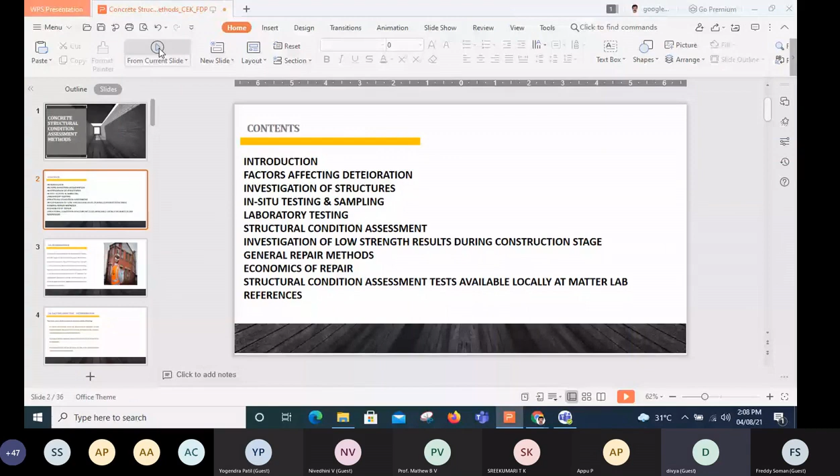The topic is concrete structural condition assessment methods. As you might be knowing, concrete is the second largest consumed material after water. As such, it's very important to have this branch - forensic engineering of concrete structural elements, inspection engineering and everything. It's a newly developing branch worldwide. When I was working in Oman, we were part of a British company, one of the world's biggest laboratories, having presence in about 30 countries with about 200 labs worldwide - one of the biggest of its kind. Still, in a lot of areas, particularly the forensic engineering side, a lot of developments are still going on.

The most sophisticated methods and everything will be gone through today. These are some of the contents we have incorporated: factors affecting deterioration, investigation of structures, in situ testing, sampling, laboratory testing after structural condition assessments, investigation of low strength results during construction stage, general repair methods, economics of repair - these are some of the areas we will cover during the discussions today.

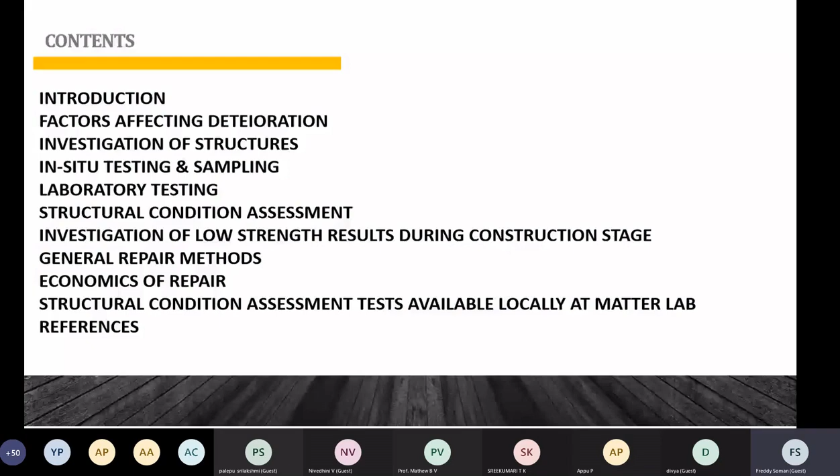As you all know, concrete, its components and its properties at various maturity stages can be tested in many ways. Concrete properties are assessed by methods ranging from strength tests to various other tests, including durability and its capacity to protect the embedded reinforcement steel. While some methods require extraction of samples from site, some methods constitute in-situ testing, doing testing at site.

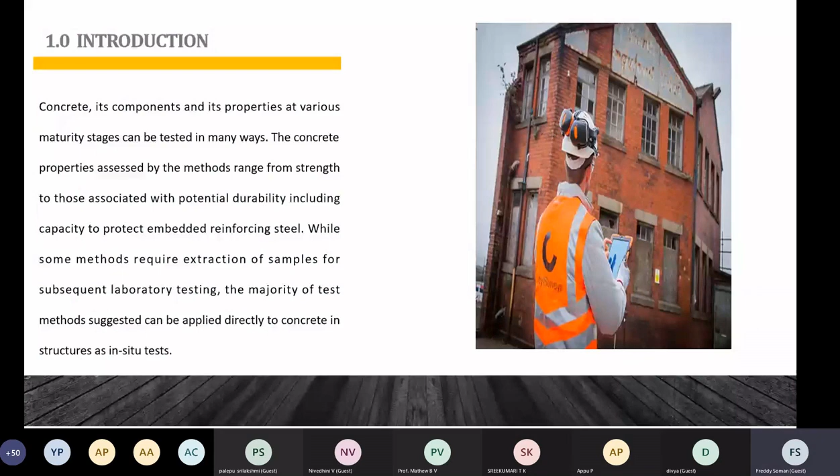Our aim of investigation and testing regime should be to obtain sufficient information on the condition of the structure to enable appropriate remedial steps to be taken. That's why, before we go for any repair or remedial measures, it is imperative to have the structures studied properly to understand the intrinsic and underlying problems. Only after that should we go for the remedial measures. It's necessary to have a sound understanding of the underlying issues before we set out any repair programs. That's the one important thing we all want to keep in mind.

What are the major factors affecting deterioration? Whether a building is new or very old, there are several factors that may affect its deterioration over time. The major causes may be inbuilt problems such as inadequate design, poor workmanship, use of unsuitable materials that don't suit the correct specifications, inappropriate use of cement, or inappropriate concrete mix design. The mix design itself may be wrong.

Again, features which appear during construction - some distresses may appear during the construction stage itself or shortly afterwards - and problems caused by the actions of the local environment on the completed structures. Over time, due to environmental effects, buildings or structures may deteriorate. The features which appear during construction or shortly afterwards include a lot of distresses, particularly cracks, spalling, and other issues. There are several types of cracks.

Before the hardening stage, plastic shrinkage cracks are there, plastic settlement cracks are there. Sometimes construction movement would be there, formwork movement would be there, sometimes subgrade movement would be there. In our part of the world, like Kerala, frost action is less, but if you move to Europe, sometimes early frost damages would be there on the structures.

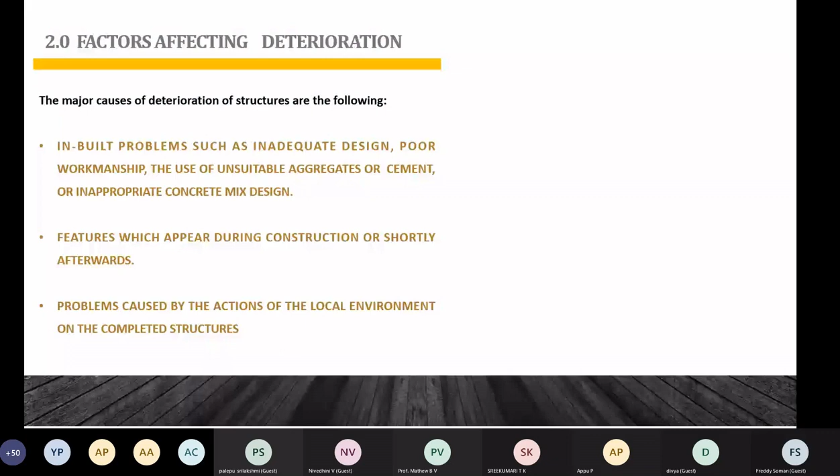Types of deterioration that occur in concrete structures are most often related to, as I mentioned earlier, when we go for some old buildings or old structures, mostly due to exposure to environmental conditions and everything related to deterioration.

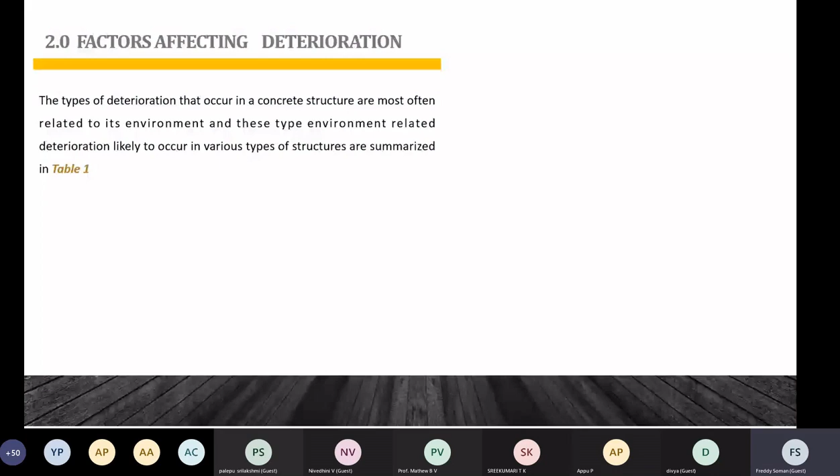In the next slide, we have summarized and classified a lot of environment-related failures. These are very important - when we go for structural investigation, we want to understand this at the planning stage as well, to understand what the causes will be. It's just a summary, but it will be very helpful - a good tip.

And sulfates, when it comes to sulfates, it can cause salt weathering. Sulfates can even damage the concrete, apart from the strength, because sulfate will not cause that much corrosion of the reinforcement, but it can deteriorate the structure. So it can reduce the strength and sometimes damage the concrete. That's why sulfate is also dangerous.

Again, some marine creatures, marine organisms - when we come to marine structures, all these factors need to be taken care of.

When we come to normal bridges and highway structures, about 90-95% of the problem would be lying with chlorides from the environment. Sometimes through dust, or from condensation of vapor when atmospheric moisture with dust condenses, that will make some precipitation. Once it evaporates, it will cause a lot of chloride. This infuses into the concrete and causes a lot of corrosion. So when we go to bridges and highway structures, more than 90% of the reason behind deterioration could be chlorides.

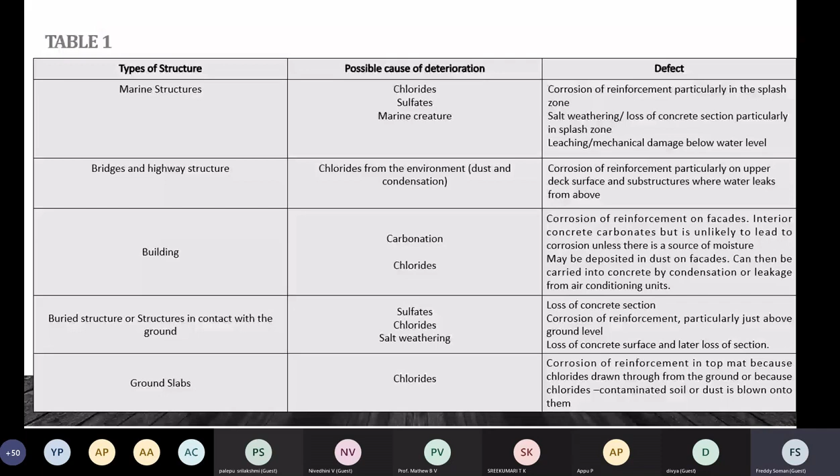Ground slabs - when we come to ground slabs, mostly chlorides are causing deterioration. Similarly, industrial plants could have chlorides, tunnels have chlorides and sulfates. Then trafficked areas, apart from chlorides and sulfates, there is chemical contamination, and even abrasion can also cause damages and deterioration.

And sewer pipes, particularly the sewer pipes, in the majority of cases it's sulfates. Due to sulfates, as I mentioned earlier, it can damage concrete and cause loss of concrete section as well. That's why for sewer pipes we should be very keen on sulfate testing, and focus more on the sulfate content in the nearby soil.

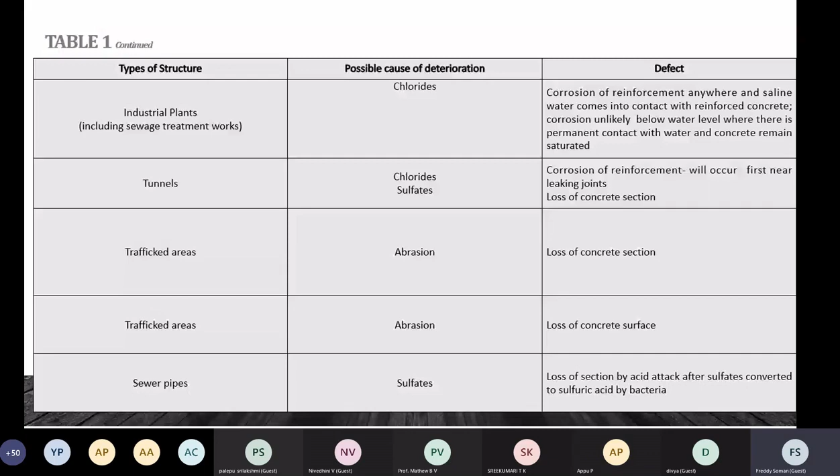Now, when we plan for an investigation, we actually look at the sampling rate and the desk study. Before we go for any investigation, we have some problems - for example, at construction time, some issues may arise, like cracks, as I mentioned earlier. Commonly, a lot of cracks may appear.

Sometimes other issues like spalling, whatever it may be, during the construction stage or after construction, whether it's an old building or not - whenever we go for an investigation, we should go for test planning and testing. That's also very important because everything is based on that. For example, recently some companies contacted our material lab to do structural investigation of some old buildings. That time also, first we will conduct a site visit, and from the site visit only, we will come to know the actual condition of the structure.

Based on the preliminary site visit, we will decide how many samples to be taken and the testing locations, where the samples should be taken, what should be the number, and to what extent. These things should all be based on the preliminary site visit. Again, whenever we plan for an investigation study, we want to take into consideration the members of different types we want to incorporate.

For example, if we go for a building investigation, we want to incorporate columns, beams, slabs. Sometimes we want to excavate the footing, otherwise it will not be complete. Sometimes we study everything, the superstructure, and we miss out the footings. Footings may be damaged, proper waterproofing may not be there. That's why, even though I haven't mentioned it specifically, footings are very important, along with columns, beams, slabs. Whatever structural members and elements are there, we should incorporate.

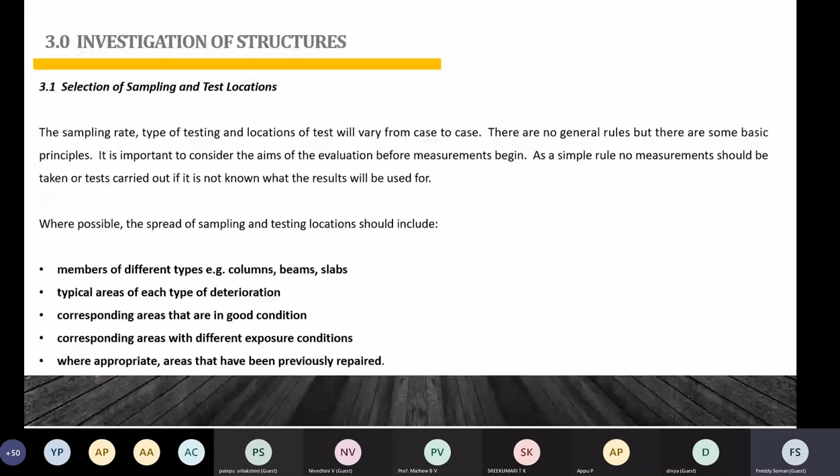Then during an investigation, as I mentioned earlier, different test methods and procedures may be used. Our aim with this investigation is also to give you different options when you have a problem in hand - what options are available. I think this will give you some clue and be helpful to know what options would be available when you encounter an issue. That's why different types of test methods would be available.

As I mentioned earlier, some of them would be non-destructive methods, and some would be partially destructive. Sometimes we want to take core samples, sometimes dust or powder samples of the concrete for chemical testing - I'll mention all that in later slides. These partially destructive methods don't cause much damage to the structure.

Even as a lab, when we go for taking cores, first we'll mark out the steel spacing and everything, then we will avoid cutting the steel - we have the equipment for that too. When we take a core, we will take the smallest core possible, just to make minimal damage to the structure. The core, when compared to the total structure, is nothing actually.

We should always try to take the core while avoiding cutting steel. There are tools to mark the steel before taking the core. That's also something you have to consider before going for any core sampling or dust sampling. You should not cut the steel.

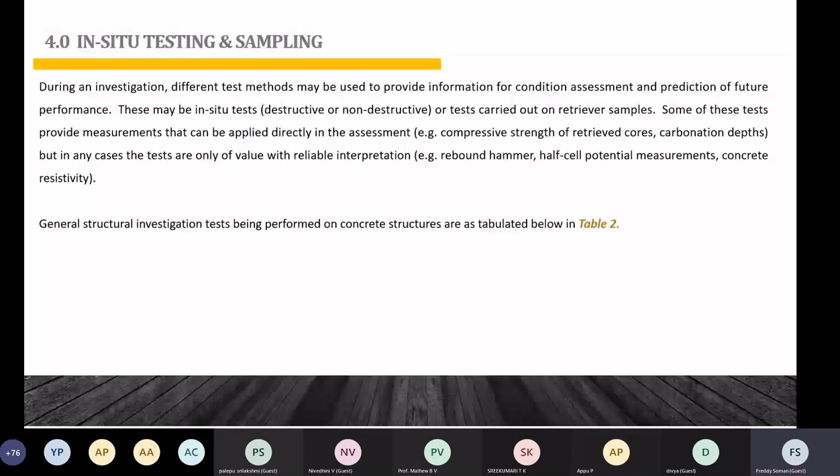These are all some of the areas. When we come to the various tests and everything, you could see that. Also one more thing you want to take into consideration, in some cases.

Anybody want to ask any question or something? Can I continue? You can continue, sir. Yes, sir.

Concrete strength. When we go for various methods, different properties are considered for each. What is the property we want to find? We want to ascertain, and based on that, there are various methods. First thing, concrete strength.

When we go for concrete strength, in my opinion the most appropriate method is the core test, because it will give the distinctive strength value. It's a direct measure, and it's very easy to interpret from the core test results. That's why core is the best, most reliable and most widely applicable method for measuring concrete strength.

But in some cases, near surface tests, particularly tensile properties, are very important. For example, sometimes old and new concrete would be present, where at some point of time there would be some repair, and there would be an interface between old and new concrete. In that case, sometimes we want to find out the bond between the old and new.

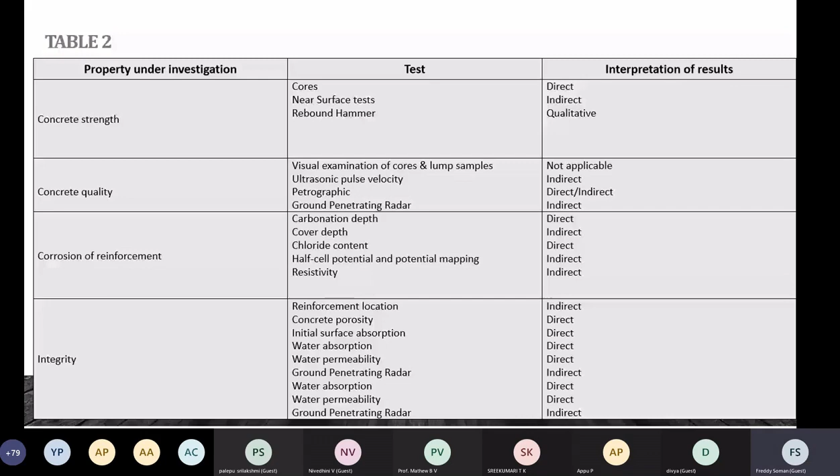Then we come to the first test, concrete coring. As you know, we need a rotary core drilling machine and diamond tipped drilling bits to take a core. When taking the core, it can be in the vertical or horizontal direction, which is very important. The core drilling operation itself is also very important. Experienced operators only should take the core because the perpendicularity and flatness of the core are critical. That's why we normally go for special accreditation for concrete coring and core testing.

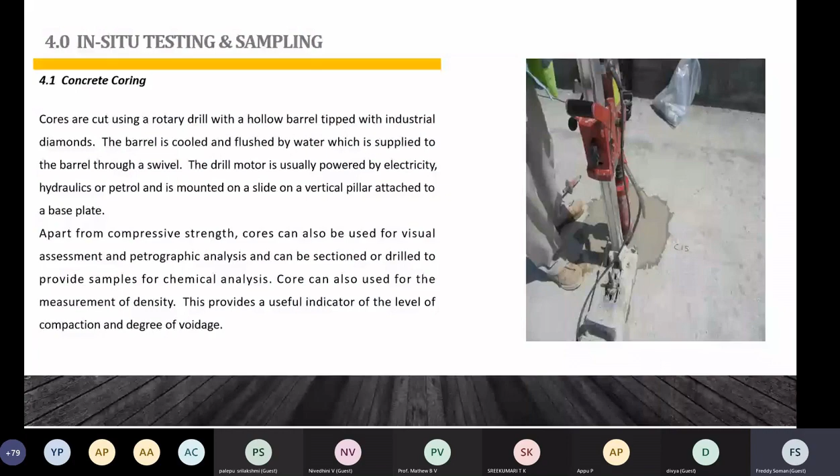Because if a lab doesn't properly do the core test, it can give misleading values. Sometimes good concrete will give a bad, low strength result if the core isn't properly taken and prepared, particularly the ends which must be properly cut, with flatness and perpendicularity checked. It's a very important test. Apart from compressive strength, as I mentioned earlier, cores can also be used for visual assessment and petrographic analysis.

Okay, sorry for that break. Okay.

Now we move on to rebound hammer testing. You might have all seen this equipment. It's a small handheld equipment, and as I mentioned, it's used for fast testing.

Hello. Hello. Yes, ready sir, I can go on sir. Or do I have to wait? I have to wait further, sir. No, you can proceed. Okay, I'll proceed then, sir. Hello, hello, sir, you can proceed, sir. I am sharing the screen, sir. Okay, sir.

As I mentioned earlier, the rebound hammer is a good handheld equipment, very easy to use, and one of the most widely used and best known methods of all time. It gives an indicative value, but the only limitation is it should be correctly interpreted to get some idea about the strength.

As I mentioned previously, just for comparative purposes, if there is any strength variation correlated against some strength correlation values, we widely use this rebound hammer method. Otherwise, for a distinct strength figure, we have to go for core testing. This is a good method as a quick measure to check the quality of strength variation.

Now we move on to the next slide.

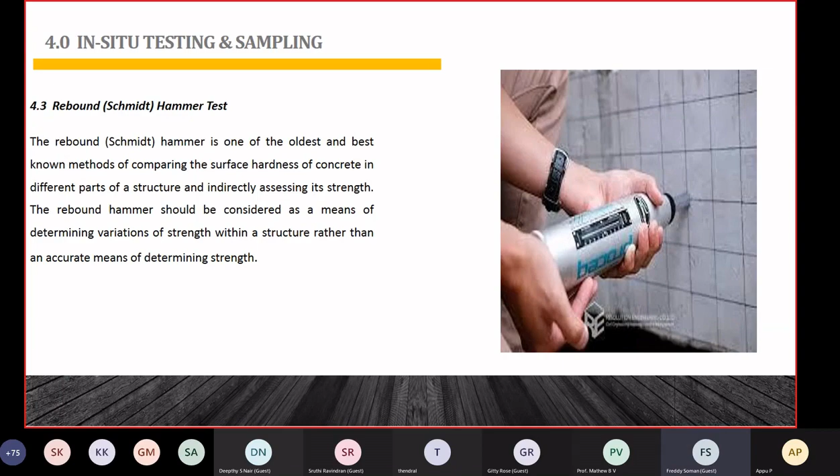There are three types of measurement methodologies. One is direct measurement - if it's a column, we put one transducer on one face and the other transducer on the opposite face. But in some cases, like beams, slabs, and so on, direct measurement will not be possible because we cannot go through that much, and the accuracy will be affected. That's why we have to go for indirect measurement.

In the indirect measurement case, both the transmitter and receiver will be on the same surface, the same face only. In the first case, the direct method, the transmitter and receiver will be on opposite faces. That is the direct measure, and it is the most accurate and most reliable measure. For the other method, we have to apply some correction factor.

There is another method called the semi-direct method, where the transducer is placed on the top face and the other one on the adjacent side face. That is an indirect measure. So there are three types of measurement possible.

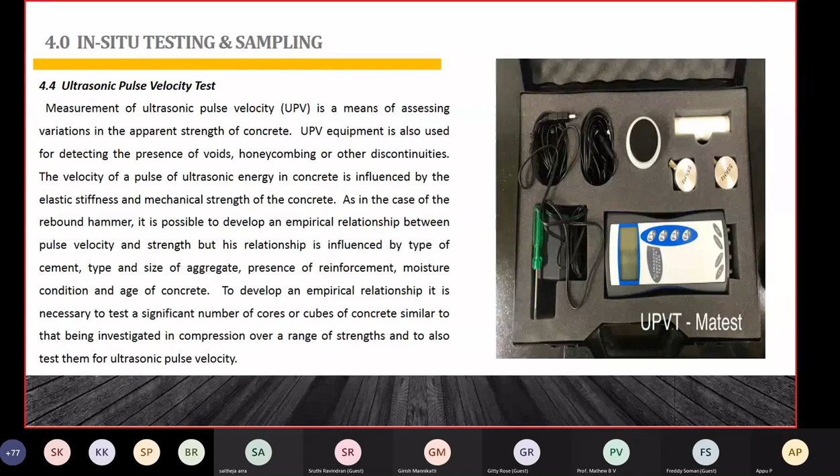That's very useful. I don't know whether any of you use this to find out the crack depth, but if not, you can use this one. In MATLAB, you can do that also. Sir, you can move to the next slide.

Now, near surface strength test, as I mentioned before, to find out the pull-out and pull-off test. In Europe, there's a practice when they construct large and important buildings, they put some insert in it, so later, if there's a strength issue, they can pull out that insert and find out the strength of the concrete.

There are some methods to interpret the strength of the concrete. That's very useful, and it's widely used in Europe and even in America or the States. There's a Capo one equipment. We can do that in MATLAB also, then we can cut that.

Normally, to find out the near surface strength test, as I mentioned earlier, we cut a small core and do not break the core. We keep the core there itself, cut it and leave it there, then pull it off using a pull-out equipment.

Here we purchased a pull-out equipment from POSAC, Sweden. There are also some good German pull-out tests. In MATLAB, we purchased it from Sweden, from POSAC. That's a good equipment, normally used for finding out the near surface strength test.

Then BRE also suggests some good methods. The near surface test is sometimes very useful in certain investigations. It's a very useful test, so you can move on to the next slide, sir.

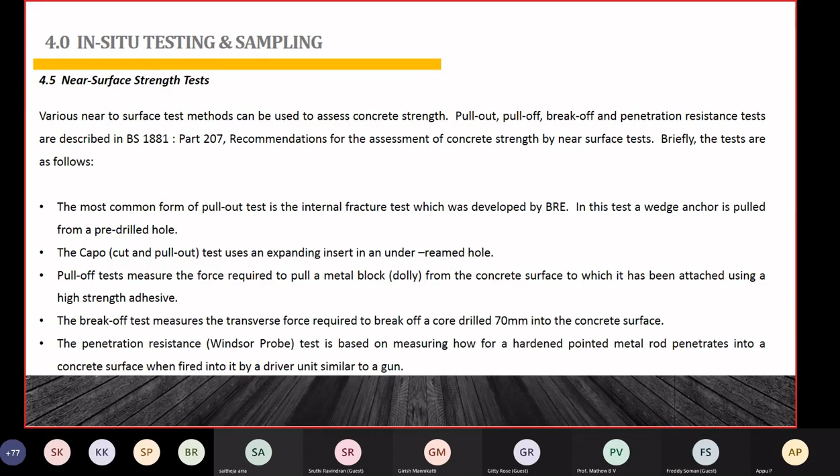Okay, this is one cover meter. As I mentioned previously, we want to find out the concrete cover. Whenever we go for investigations, one very important parameter is the concrete cover, because inadequate concrete cover can cause a lot of issues, corrosion issues and everything. That's why cover is also very important.

Apart from cover, this equipment can also be used for other purposes. This equipment you can see is a MATLAB equipment only, I took the photo of it. This one also came from Sweden. It's a good one, and we can find out, in some cases, what happens.

Sometimes the building would be very old, and we lack any structural drawings or anything. In those cases, we can correctly find out. Last week also, our MATLAB team went to Ernakulam to do a cover meter survey in some buildings, to do some surveys. Particularly when we lack structural drawings and as-built drawings, in those cases it is applicable to find out the reinforcement position, orientation, and even the diameter of the rebars.

Diameter of the rebars we can find out using this equipment, and also reinforcement position, bar position, and at what depth it is embedded, that is cover, and the orientation - everything we can find out using this rebar scanner Proceq. There is one head unit for the scan, a scanner unit, which is connected to the readout unit where we get all the readings, which has a computer interface as well. Most of this equipment, including the UPV testing equipment, has computer interfaces to connect to the computer and take all the readings. Okay, next slide, sir.

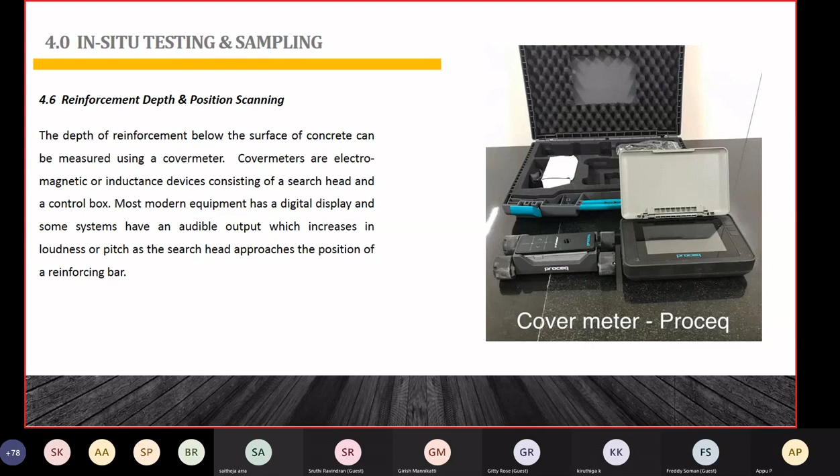Carbonation depth is also one of the very important properties to check. Whenever we go for investigation, as I mentioned earlier, corrosion can mostly be due to chloride contamination, or sometimes due to carbonation. Over time, most buildings, when exposed to atmospheric conditions, will carbonate, so determination of carbonation depth is very integral and important, and it should be incorporated in the testing. Now, how do we determine the carbonation depth?

We make a fresh surface on the concrete, and on that fresh surface we spray a phenolphthalein indicator. When the indicator changes color to pink, that means it is not carbonated. When it shows colorless, that indicates it is carbonated. Carbonated means pH would be less than 9. If not carbonated, it means it's alkaline, with pH more than 9. It's a good measure — carbonation is a very important test.

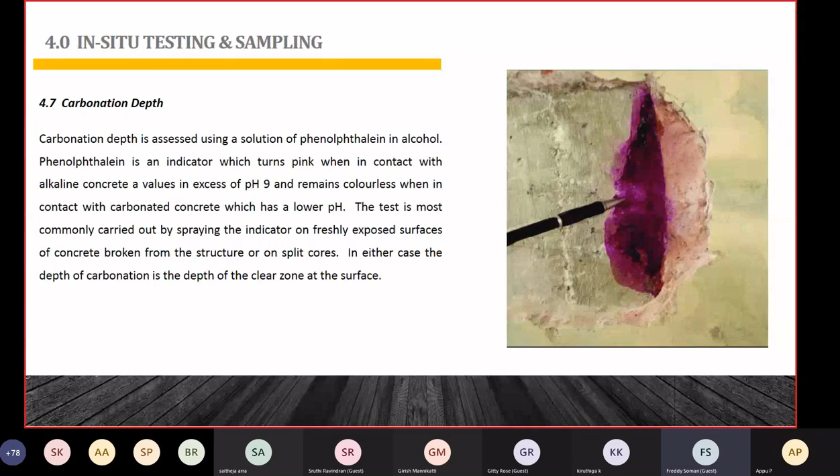Okay sir, we can move on to the next.

Next is the half cell potential survey. Half cell potential is a very important test to find out the corrosion potential — how much potential there is for that structure to get corroded, whether corrosion is happening now or is going to happen. All these measures we will get. This test is done actually for one slab. What is not that clear — half cell potential is a very, very informative test to find out the corrosion potential.

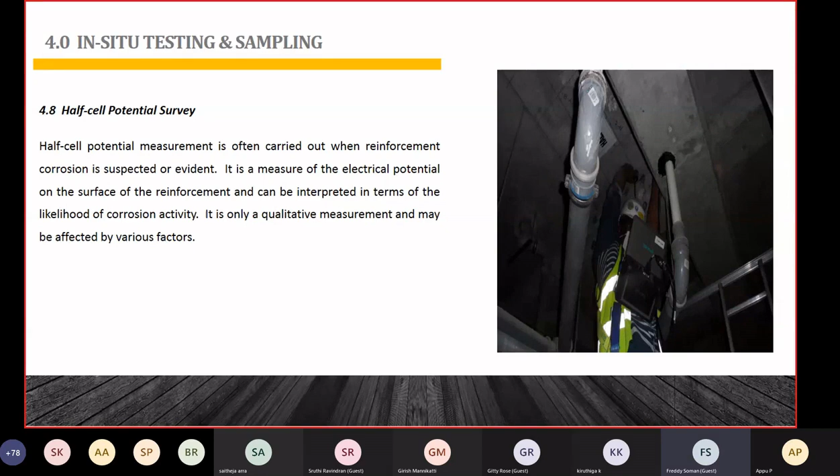Half cell also has copper sulfate cells, which will be connected to the equipment. The equipment itself contains these cells. Copper sulfate cells will be connected to a voltmeter, and the reading is reported typically in readings per 1 centimeter. Most equipments give readings — half cell potential readings in voltage, a potential voltage reading. In the later slides, we'll give you the values in that case.

Okay, next is the resistivity survey. This resistivity survey gives results in ohm centimeter. I made a mistake in the previous point.

The resistivity survey — how we normally do it is parallel with the half cell, because, as we know, these are all electronic equipments. That's why, in order to make our interpretation 100% accurate, we always try to do resistivity survey alongside the half cell survey locations as a reconfirmatory test. For example, if half cell potential shows corrosion activity is certain in an area, and that is again underlined by the resistivity survey readings, then we can conclude that corrosion is 100% certain in that area. That way, as a reconfirmatory test to confirm corrosion activity, we do this resistivity survey also.

Okay sir, next slide.

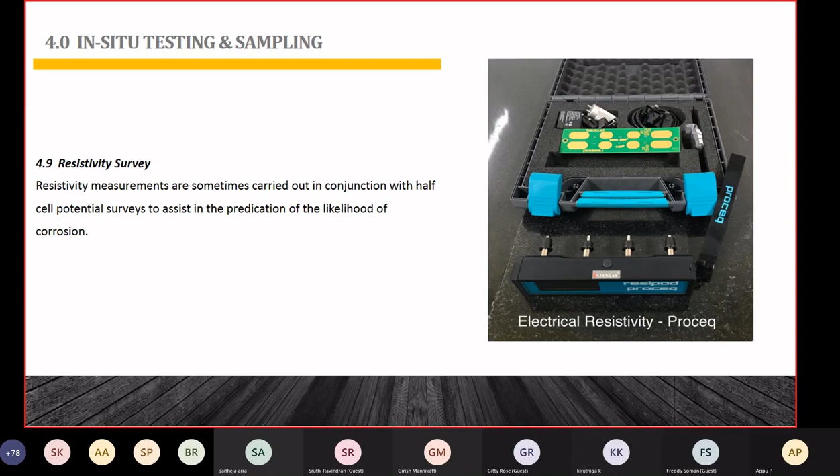Now we come to the laboratory test side. As I mentioned earlier, all the samples extracted during the field work stage will be dispatched to the lab, and there the core will be tested for compressive strength, and also, as I mentioned, for degree of compaction. The core will also be useful to find out the degree of compaction, because visually, based on aggregate packing and everything, we can find out how well it is compacted, and whether any voids, honeycombing, or cracks are present.

Then, the test samples we collected will be analyzed for chloride content in the lab to find out the chloride ingress profile. At the same time, the sulfate content will also be analyzed in the lab for sulfate content testing. Now we can move on to the next slide, sir.

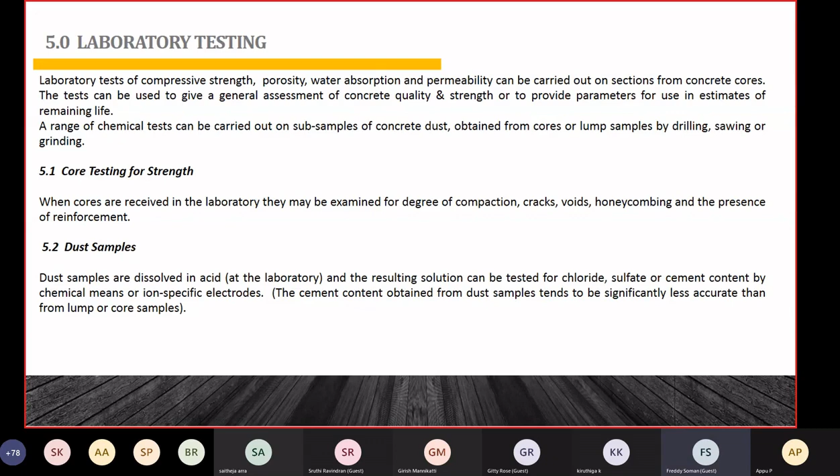I think in some cases petrography is very important, particularly when there is fire-affected buildings. I came across a lot of cases whenever fire occurred in buildings, and in Oman the government also appointed us to study and give them a full report, particularly to find out the extent, because generally in Oman mostly limestones are used, and the heat properties are different when compared to the rocks we use here. That's why it's very important.

Doing the petrographic examination is very important, particularly for fire-affected buildings. But in some cases it's not required, because the UPV test will also give some good values. For fire-affected buildings, you might be knowing, in my career I came across several buildings for building investigation.

We get very good patterns when we do ultrasonic pulse velocity tests also, because in fire-affected buildings we want to find out the extent of damage. In that case it's very important to find out each and every detail. Even sometimes we will cut the steel from the structure and test it to see how the steel properties are affected. Similarly, concrete cores we will take and petrographically examine to find out any internal damages to the concrete.

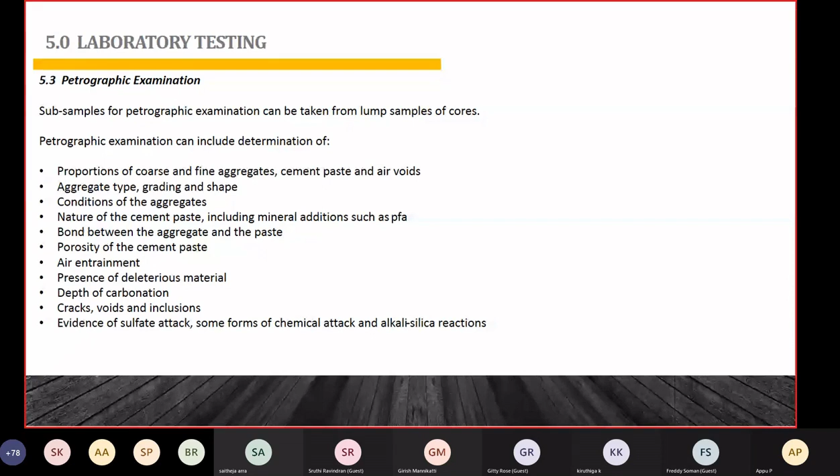Water permeability testing is not always very important, but in some cases clients want it, particularly in coastal areas where bridges or structures exist and durability is a high concern. In such cases, we can extract cores from the site and do water permeability testing in the lab. We have this facility at our materials lab. We normally do this test in areas where there are durability concerns.

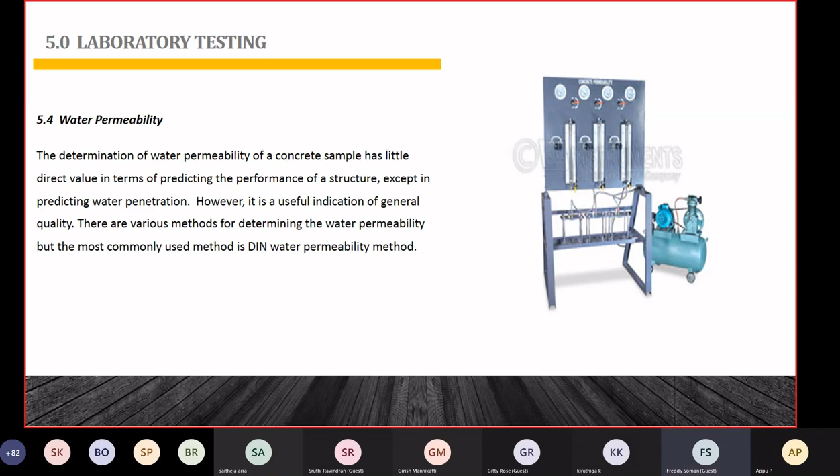Now for the structural condition assessment, which is the last stage. Once we've completed most of the tests, we want to interpret the results. This is also very important. Whenever we present the report, the visual assessment of deterioration can provide useful information.

One is the visual examination of the site. Whenever we go for investigation, we have to do a visual examination, particularly of cracks. From the crack pattern, we take the crack depth, crack width, crack length, and the overall crack pattern. From the crack pattern, and where and at what age the crack appeared, these things give a lot of clues to find out the root cause of deterioration. That's why crack patterns are very important, and we always incorporate this visual assessment.

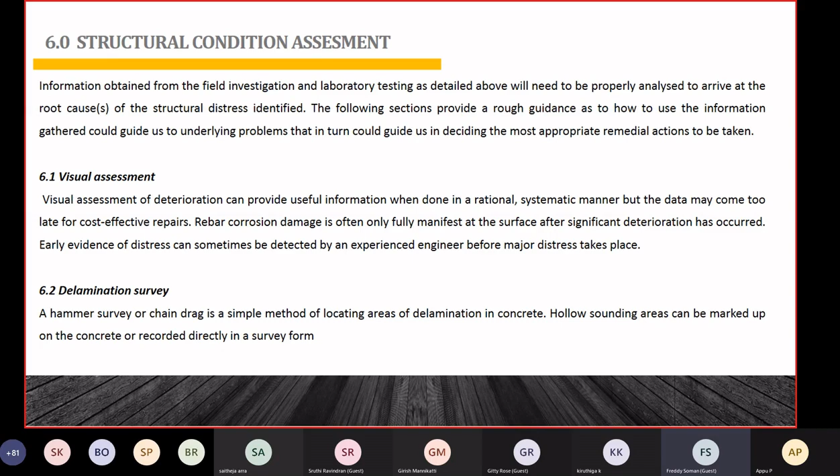Then the delamination survey. Whenever we go for investigation, we have to do a delamination survey as well. It's a very easy test - with a small hammer we knock on the surface. If a hollow sound comes, that means the area is delaminated. Normally we randomly select an area, maybe 2 meter by 2 meter, and do the survey there and give the report. If some area is found delaminated, we extend the area and incorporate more area into the delamination survey. From the hollow sound, we can easily identify delaminated areas.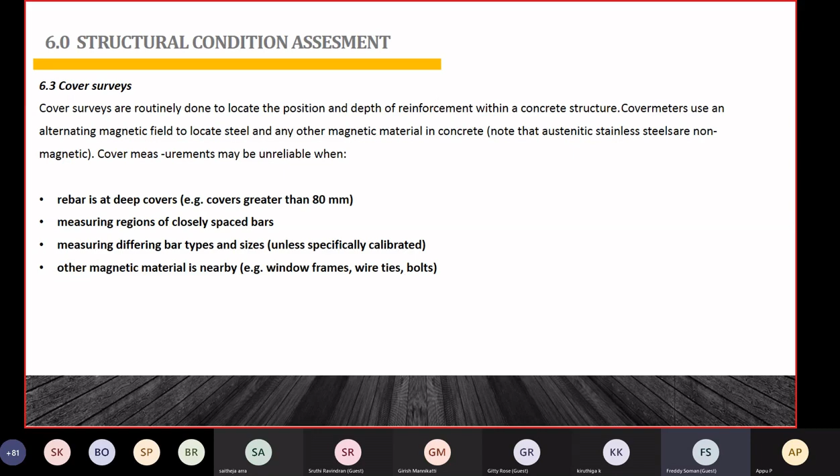Moving to chloride testing, which I mentioned earlier - after chloride testing we can find the chloride content. If it's less than 0.4% by mass of cement, the probability of corrosion is low. If it's 0.4 to 1%, it's moderate, and if more than 1%, there's a high chance of corrosion. This is chloride testing, though it's based on assumptions.

Another test is the chloride ingress profile. When we want to repair, we need to scarify some concrete, break it out, and remove the contaminated surface area and cover. Up to what depth we need to remove is determined by the chloride ingress profile test - it tells us up to what depth the concrete is contaminated, so that part can be removed and repaired with new mortar or concrete. This is very important because if we don't correctly identify the chloride contamination before repair, the repair will not sustain - the corrosion activity will continue and damage the concrete again.

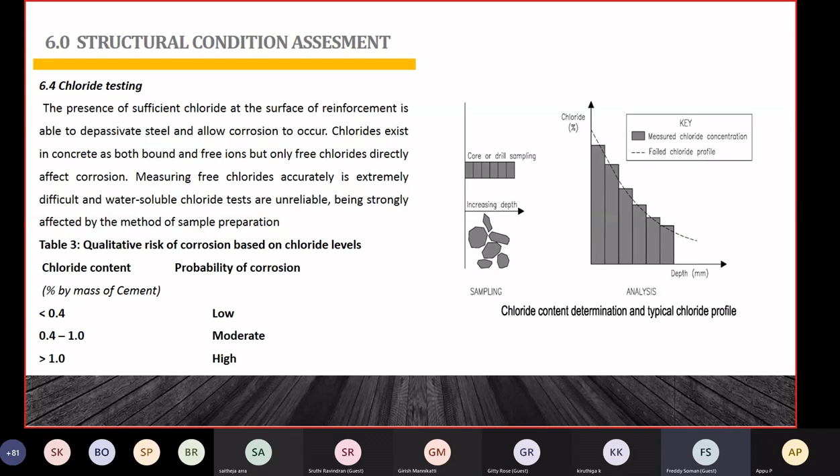That's why we have to correctly find out whether chloride contamination is there. If chloride contamination is there, up to what depth the chloride contamination is there. And up to that depth, you want to scarify, remove the concrete and go to the rebar.

Now the carbonation depth, same as the chloride content test, carbonation depth is also very important. It's the depth from the surface up to which the concrete is carbonated. Up to that depth, the concrete has to be removed and replaced with new concrete or new repair material. Carbonation is also very important, that's why we do the carbonation depth test.

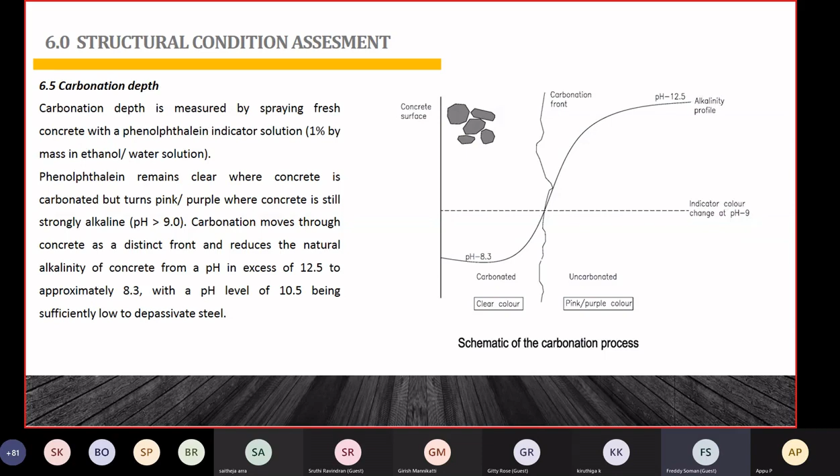Moving to the next slide, now we come to the rebar potential, half-cell potential assessment. This is what I told you, the reading is given in minus millivolts. If the reading is less negative than minus 200 millivolts, there is less chance of corrosion, we say about 5% chance, very uncertain. There is no chance of corrosion, if it is, actually.

If it is minus 200 to minus 350, there is 50% chance of corrosion. And if the half-cell potential reading is more negative than minus 350, there is more chance of corrosion, about 95% chance that corrosion activity is taking place in that area, the corrosion potential is high. That is why, as I mentioned earlier, the electrical resistivity test is also very important. Sometimes the half-cell potential reading will give you a reading of 230, meaning there is only 50% chance. Then, in order to reaffirm whether there is corrosion activity there or not, we want to do this electrical resistivity test.

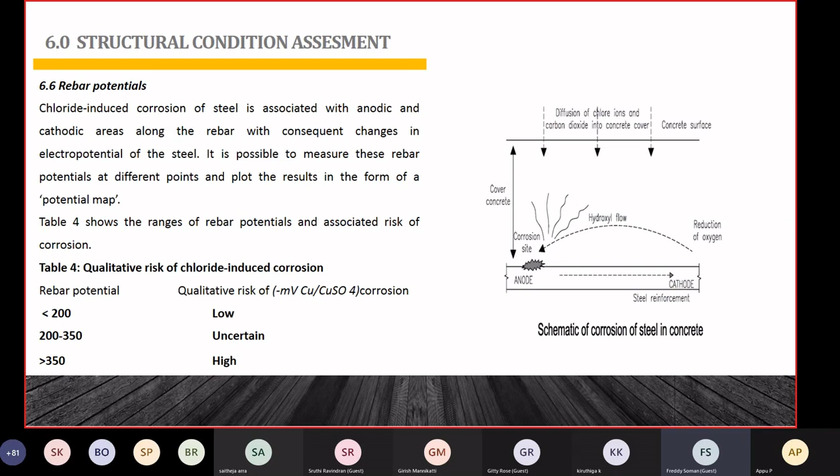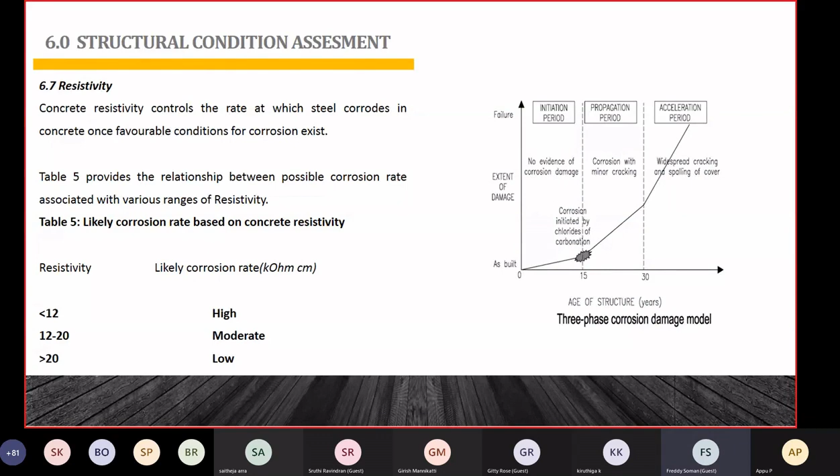If the reading is less than 12,000 ohm centimeter, say 5,000 or 6,050 or whatever, there is high chance of corrosion. That means when our half-cell reading is 230 and the resistivity survey reading is 8,500, we can assume there is high risk of corrosion in that area. If the reading is between 12,000 to 20,000, it's a moderate chance of corrosion only. If it's more than 20,000, there is no chance of corrosion - sorry, I said it the other way, if it's more than 20,000, there is no chance of corrosion. Okay, move on to the next slide.

Now this one, just to give you some brainstorming. This is an area we mostly come across because there are some disputes, for example regarding construction with low cube strength results. Even though this is not that much within the investigation scope, I particularly put this slide to give you some idea on how to deal with the low strength result case. Whenever you come across a low concrete test result, we have to go for investigation, normally we take cores and check how much strength is really achieved. Then we have to interpret it properly.

As per ACI, the American Concrete Institute standard, if a particular column fails in the cube testing, then we want to go for core testing. Whenever a court or whoever appoints us, we go for a core test. In the core test, if we take a group of 3 cores, the average should be more than 85% of the characteristic strength. For example, if it was 40 Newton grade concrete and there was a dispute because the cube test failed, maybe at 25 or something like that - when we take a core, as a group of samples, the average should be more than 85% of the 40 Newton grade.

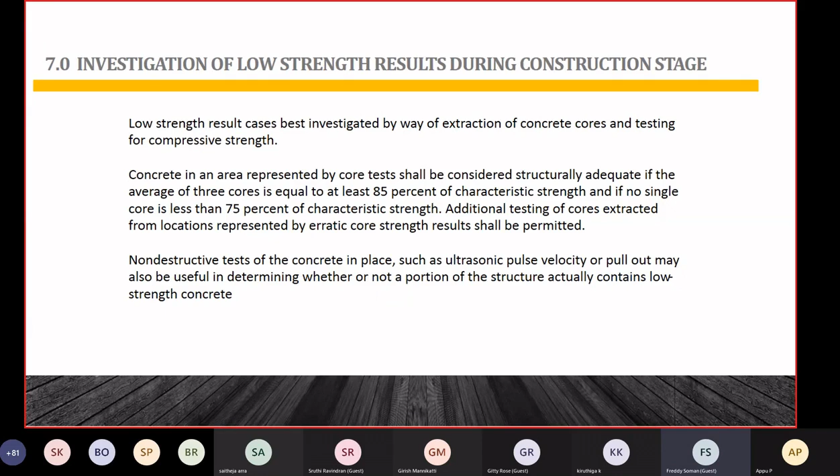Okay, then again non-destructive tests are also there - ultrasonic pulse velocity, pull-out test, and all could be done in parallel in case of disputes. Now, next slide, sir.

Before going to that, as I mentioned, the assessment of test results, once we do the test, the process of assessment is very important because for the selection of remedial measures, and for finding the residual performance of a particular structure, and also to select the proper remedial measures, the interpretation and assessment of the test results and doing investigation is very important. Now we will mention about some of these.

This is not the full scope - I have not included it largely - but just want to give you some brainstorming on some of the commonly, widely used repair methods. You might have all come across and heard about these, but you will just have a refresher.

One is patch repair with mortar, let me just read that out. Various repair options are available, and new technologies continue to make an impact in the field of repairs. Most of the repair strategies discussed here apply to carbonation and chloride induced damage to concrete structures.

This being the most common - most of the repair methods here actually address corrosion induced issues, most commonly, along with cracking induced by thermal or structural loading. Also, the suitability and cost effectiveness of repairs depend on the causes and level of deterioration.

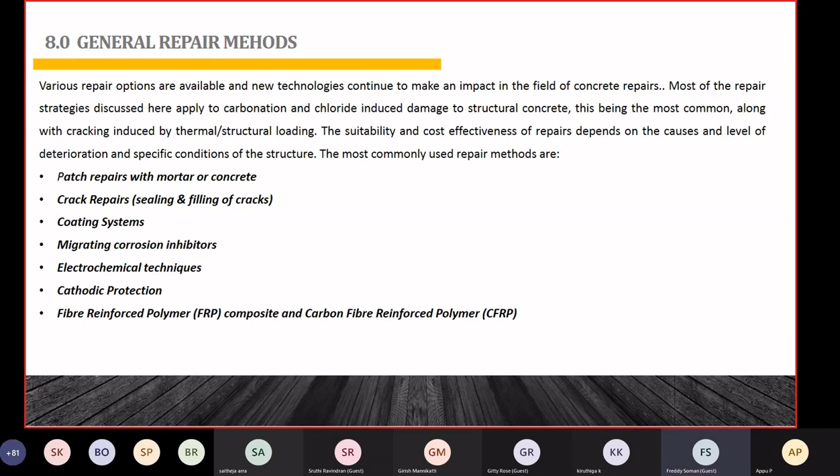Now we come to the economics of repairs. Some of these points I already mentioned in my previous slides, just to give you a good feel about that one. But economics of the repair is also very important.

Repairs of reinforced concrete structures damaged by corrosion have often proved to be unsuccessful, with further damage occurring after repair. Reasons for the poor performance of repairs include - this is what I mentioned in the previous slides too. I indicated this because in many cases, repairs are found to be unsuccessful. These are the main reasons.

We point out lack of understanding of the deterioration process and inadequate investigation and testing prior to repairs. Normally, to save money, some structural engineers will come, visually assess the damages, and recommend some repair. It will be done, but it will not go long, it will not be effective. That's why whenever you plan any repair, large or small, still the repair will not last unless at least some investigation and some tests have been done.

If you got the correct clue on the correct root cause, what has caused this, what led to these deteriorations, then there's no problem, at least for small buildings or small structures. Otherwise, in all other buildings and structures, before you carry out any repair, you must make sure it's properly studied and you understand the repair process. Sometimes inadequate funds to undertake such repairs is also a factor.

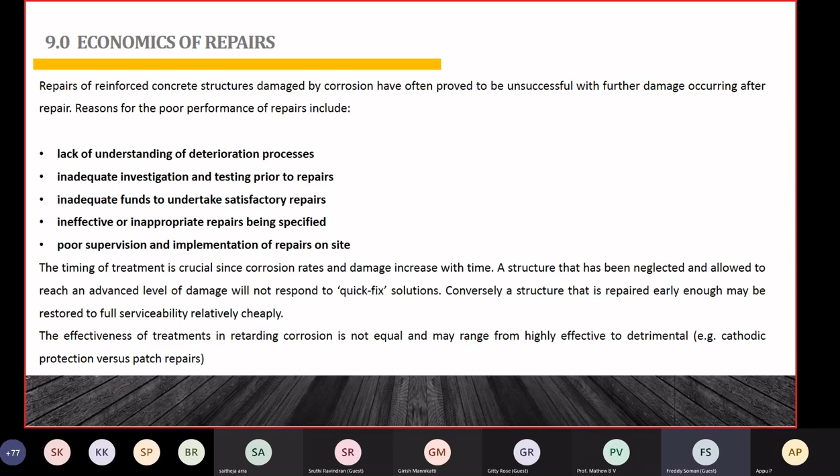The timing of treatment is crucial since corrosion rates and damage increase with time. A structure that has been neglected and allowed to reach an advanced level of damage will not respond to quick fix solutions. That's what actually happens - most times people go for shortcuts and quick fix solutions, but in most cases quick fix solutions will not work. These are the economic areas about the repair. Sir, you can move on to the next slide.

Now, when we move on to the final listings of the slide, I would like to talk about some of the methods we generally follow in Matter Lab. As I mentioned earlier, we have developed a laboratory here under ULCC. It's an independent lab actually. Anybody can use the service.

Most of the tests we have covered already in this area, but this will be useful as a guiding tool. You can use this one whenever you...

Okay, sorry for that. No problem. Okay, you can continue then.

Half cell potential, I already mentioned everything, and you will get how we'll do the half cell potential. Everything is already described in that one, and you can use it whenever you want to go for a half cell potential survey. You can use this as a reference. Now, move on to the next slide.

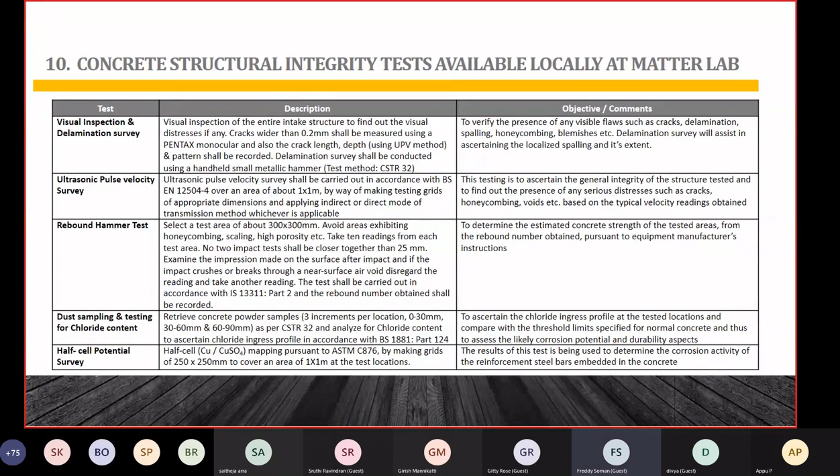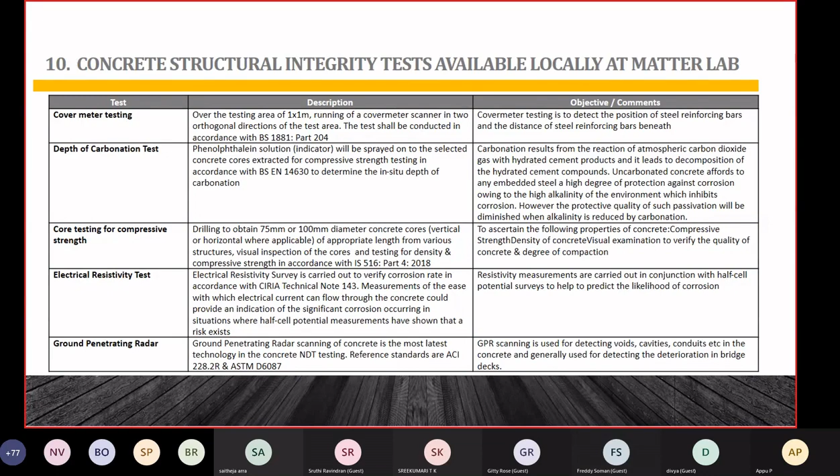Now you can move on to the next slide.

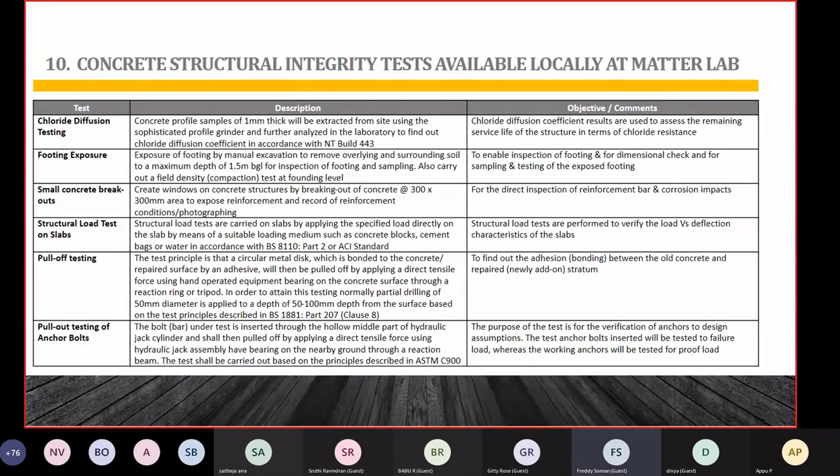I think that's it. Sir, next slide. Yes, that's it. Then there are some references.